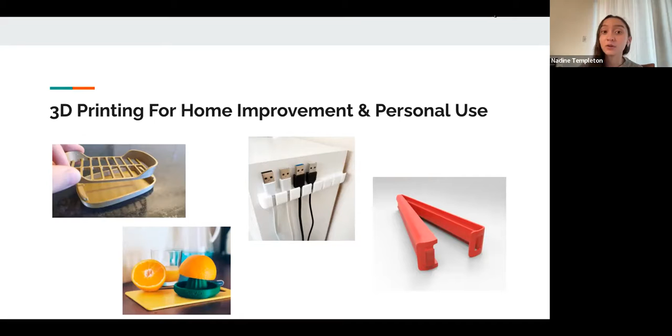On the internet, there are also a wealth of resources for 3D models that you can access on your own. One website is called Thingiverse, an open source 3D print or 3D design database that you can access for free. With this, you can search for any sort of practical 3D model you'd like to print, such as a phone stand or a cable organizer, and find the 3D print files to import into a 3D design software.

And if you're an IU student, or you're in a place that has a 3D printer, or you have your own 3D printer, you can simply import these files and print them off yourself—you don't need to do any designing at all. The hope is that in the future, 3D printers will be just as essential as a smartphone or wireless internet, so you can print these practical things on your own.

Okay, so now we're going to move into our tutorial for the evening, and we're doing a self-watering planter, which I'm really excited about. Do we have any questions before we move on?

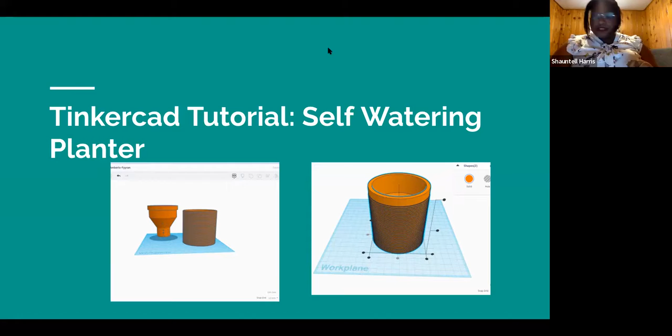So if you want to go to tinkercad.com and create yourself an account, if you don't have one already, to follow along.

Yes, okay, I will get out of here, hopefully. One moment, please. Uh-oh, where'd it go? Sorry. Okay. Now I'm going to screen share again.

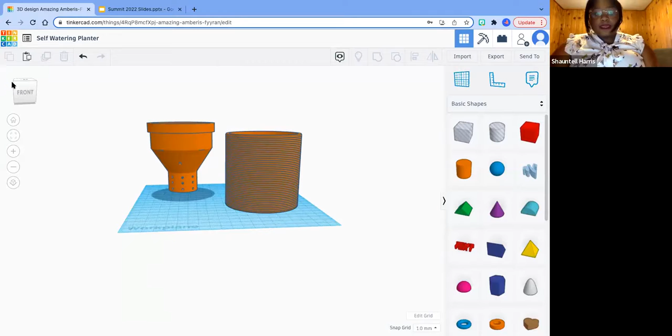Okay, so this is what we'll be making today. It looks a little difficult, but I promise it's not. Tinkercad is a kind of platform that you could use to create your own 3D printed items. It's very user friendly, and it's something I highly recommend for beginners.

So we're going to go home and create a new one. Sorry, it's taking a little bit to load.

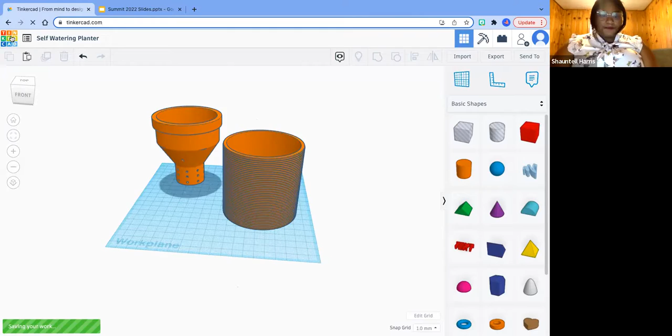We're going to create new design. Oh my goodness, I totally forgot.

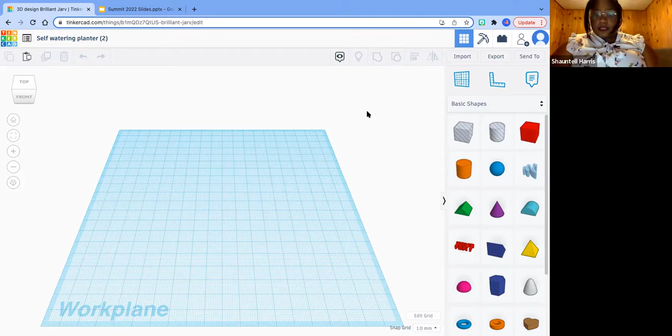Okay, I need to. And then we are going to start out by moving a cylinder to our work plane, and we're going to change the dimensions. We're going to make the length and the width and the height 80 millimeters. I find it easiest to click the boxes and manually put in the numbers.

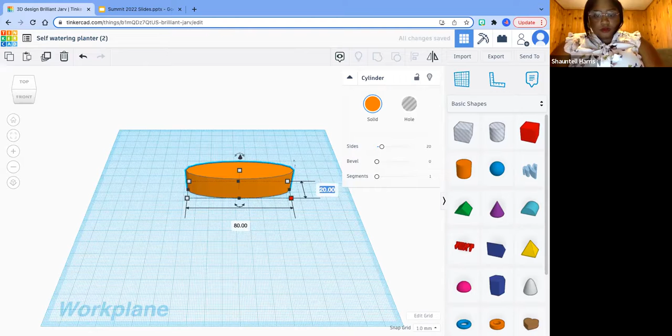There's a question in the chat: is there a code for this? You would just be starting from a blank Tinkercad work plane, if that answers your question. Or are you asking about the direction?

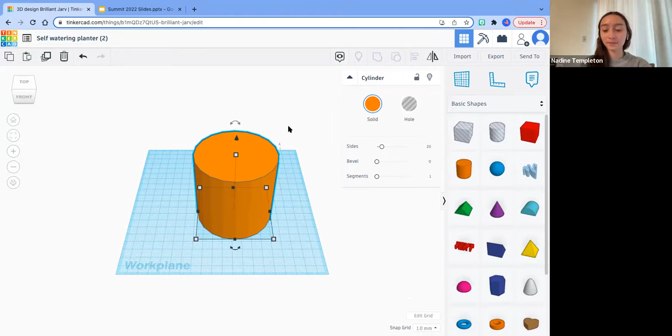So this is just our regular pot for it. And we want to add a little bit of dimension to it, make it a little fancy. So we're going to add some ridges to it.

We're going to do that by taking another cylinder and dragging it to our work plane. And we're going to increase the sides to maximum, and you'll do that right here. I didn't do that right here, so let's do that.

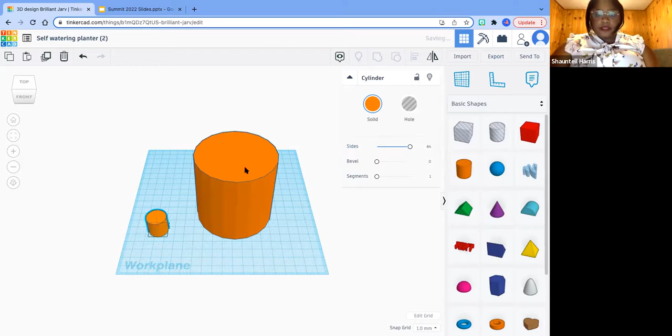And then for this new one, we're going to change the dimensions. We're going to give the cylinder a length and width of 81 millimeters. And we're going to give it a height of 1 millimeter.

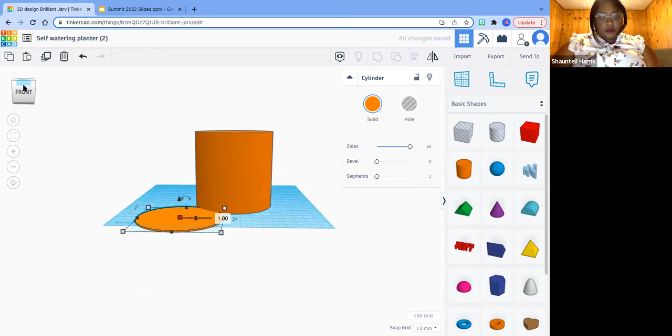So now we're going to move this second cylinder underneath this first one. And we want to align them, and we're going to do that by selecting all of it and using this button in the top right. And we want to click the center ones to center it.

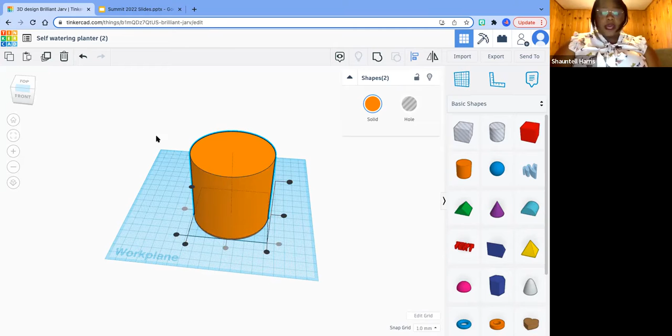Now we want to get out of align mode, and you just can click off of it. I'll zoom in a little bit so that we can see it more clearly. And we want to duplicate it.

So you do it by clicking the smaller cylinder. And there's a duplicate button up here in the top left. And you can also do Control D if that's easier for you.

So whenever something duplicates on Tinkercad, it duplicates right on top of the item. And so what you want to do is take this black triangle right here and move it up about 2 millimeters.

Like that. And then we want to make all of these go all the way up to the top. So you'll duplicate the second one we just made, and it should go up 2 millimeters. If it doesn't, you can move it yourself.

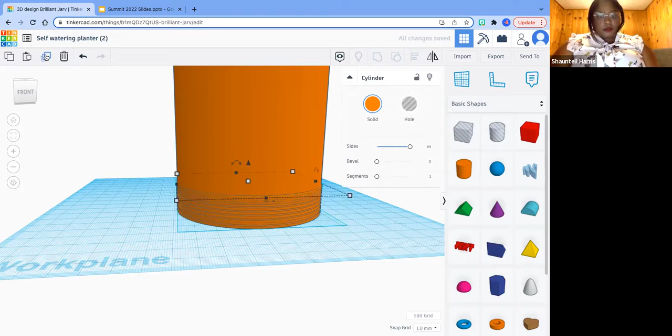And keep duplicating until it gets to the top. Whenever you see a red line on your item, it just means that it's loading. Let me zoom out just a bit. Not that much.

Sorry, it's taking so long. It was a little bit quicker earlier today.

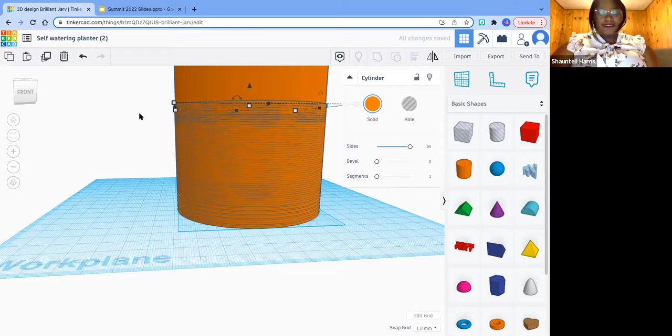Okay, now that we have ridges all the way to the top, we want to hollow out the inside of our pot.

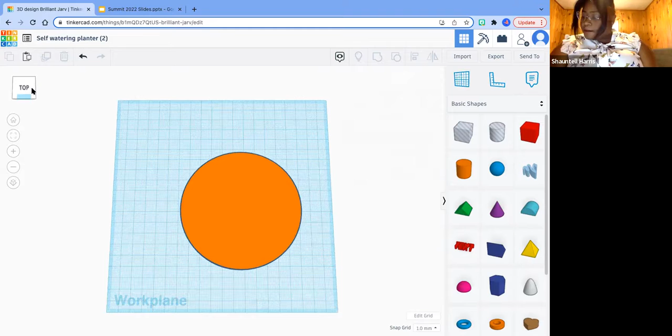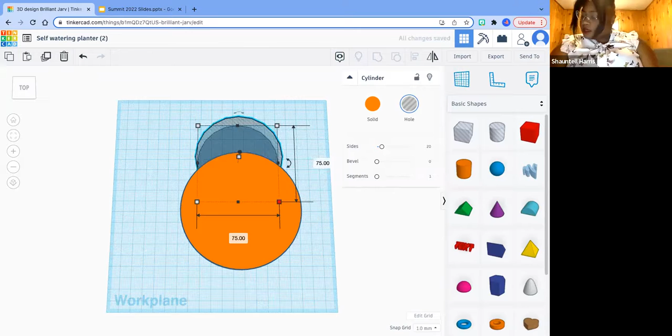And we're gonna do that by dragging a cylinder hole to the work plane. And we're gonna give it a length and width of 75 millimeters. And a height of 80 millimeters.

Okay, that's from top view, sorry. So when we group these two objects together, a hole will be created, and we want to make sure we have some thickness at the bottom so that it can hold our water, since this is a self-watering planter.

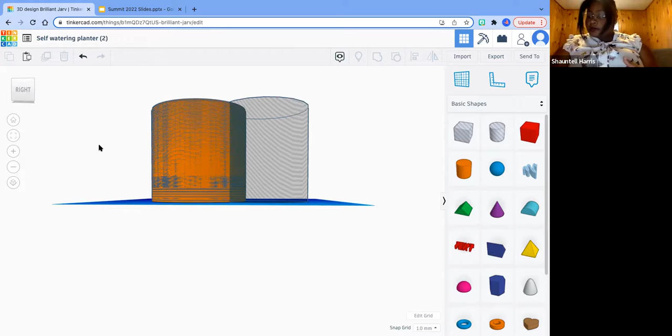So to do that, we're going to rotate our view to the bottom, and we're going to click the center square of this one, and we're going to change the height to 75.

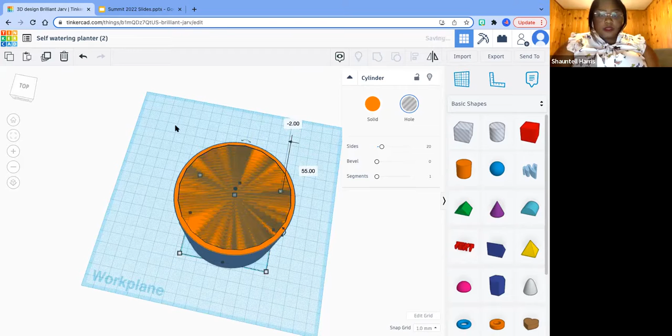Now we can align them. So we're going to go back up to top view and put this on the inside of this one, collect everything, and align it with this button up here.

Okay, and then once they're all aligned, we want to group them together, and then that'll make our hole. The group button is up next where align is too. Or you can use Control G.

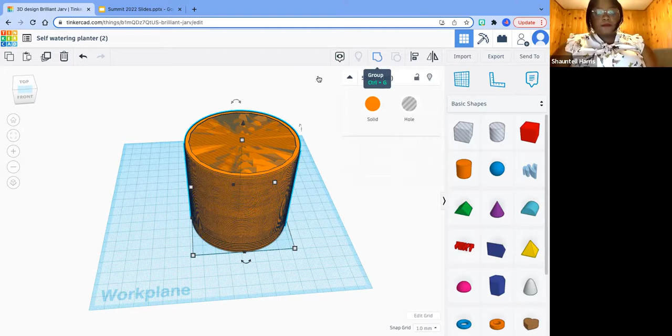Sorry, it's taking a little bit. Okay, there we go. So there is that. That's how it should look.

And that's the first part of our planter. Do we have any questions?

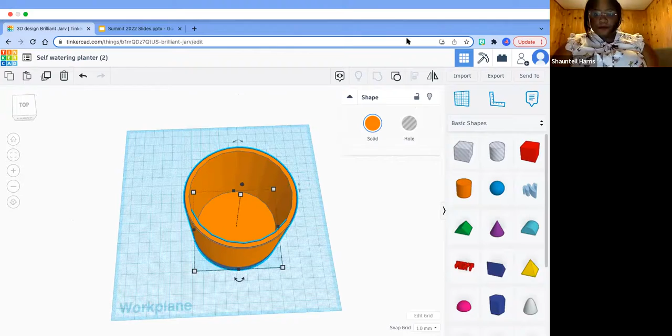So we can move this off to the side since we're done with that for a moment. And so now we're going to start with the inside of it, which is the more complicated piece of it, but not to worry. We're going to start by moving another cylinder to our work plane.

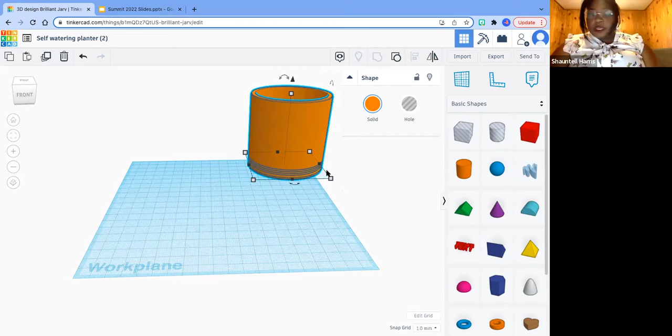And we're going to set the length and the width to 35 millimeters and the height to 24.

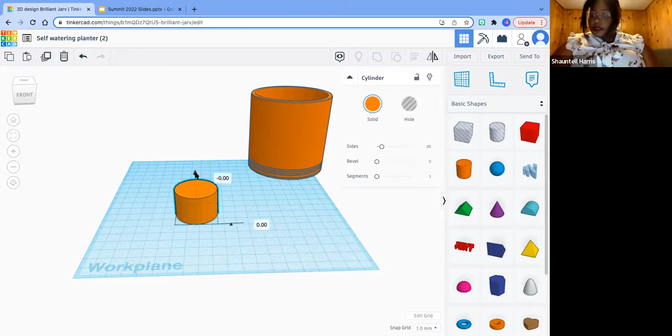Next, we want to move the cylinder upwards by 6 millimeters, and we're going to do that using this black arrow right here. Since this is how high it'll actually sit inside of the planter.

Now we want to drag a new work plane onto this cylinder, and you can do that by using the work plane tool up here.

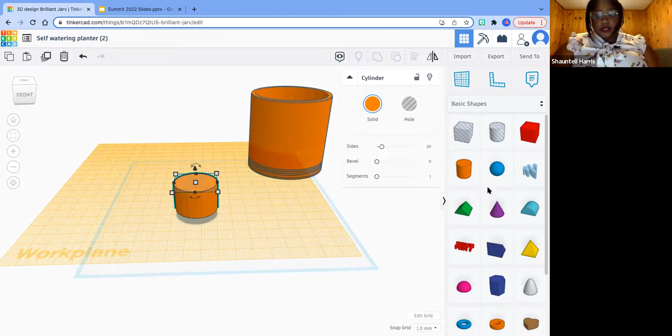And next we're gonna drag our cone shape to the new work plane. We want to make sure the sides are at maximum.

And we're gonna set our top radius to 37 millimeters, and you can do that by just clicking the boxes over here, which I find is easiest to get the exact measurements I want. The base radius is going to be 17.5 millimeters, and the height is going to be 30 millimeters.

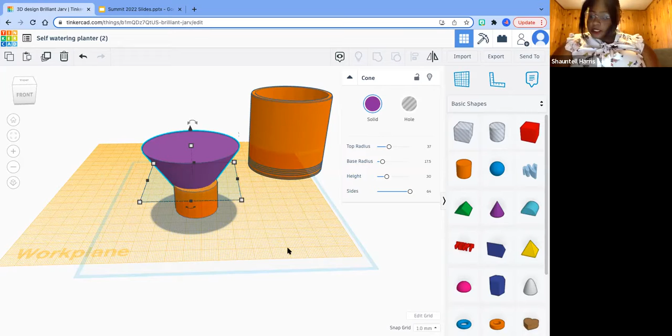Ta-da! Now we want to align these shapes. And so to align them, you're going to hold down Shift and click both of them.

And then click the Align button up here. Okay. Once those are aligned, we don't want to group them together just yet.

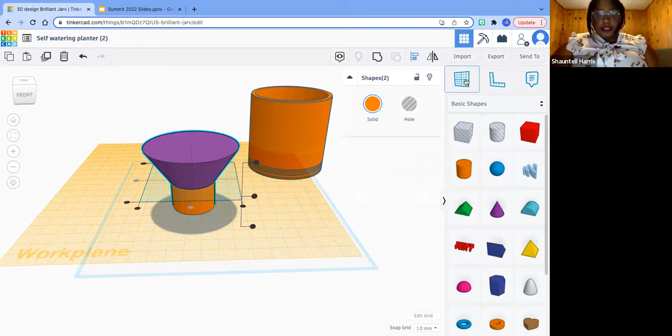We want to add another work plane on top of the cone. Let me zoom out just a little bit. And then we're going to add another cylinder on top of that.

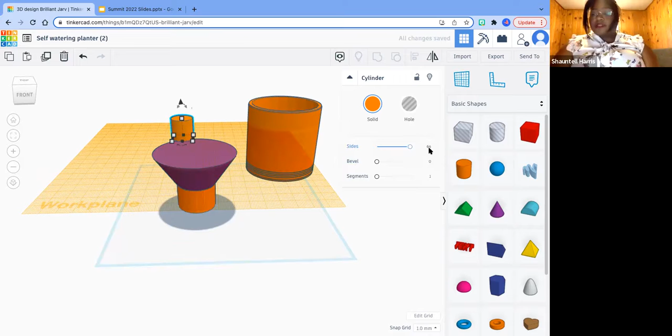We want to make the sides maximum. And then we want to have the length and the width to be 80 millimeters. Okay, and the height to be 10.

I'm sorry, I'm just trying to make sure I'm doing the right thing. I'm looking at the tutorial along with you.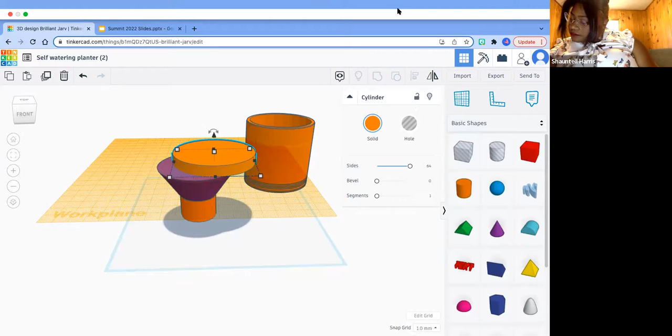Okay, now we want to add one more work plane and add another cylinder on top of that one. And this one is going to be 80 by 80 by 10.

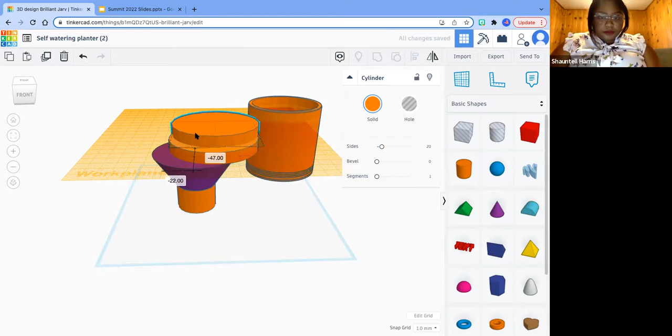Now we want to... I think I might have given the wrong ones. Okay, my apologies. So for this bottom one, I gave you the wrong dimensions, and we're gonna change those to 74 by 74 by 20.

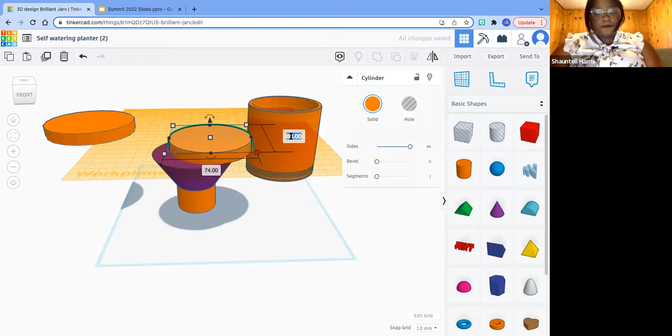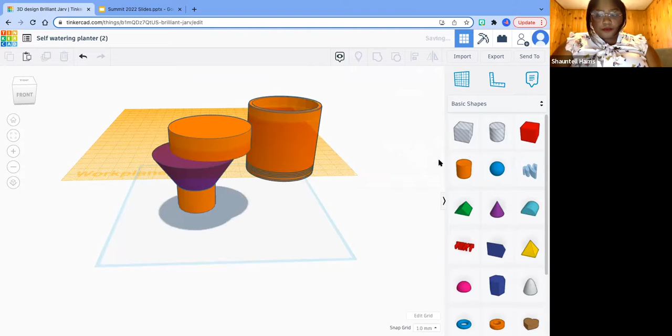So it should be a little bit thicker than this one. I'm gonna delete this one and do it over. This one is 80 by 80 by 10.

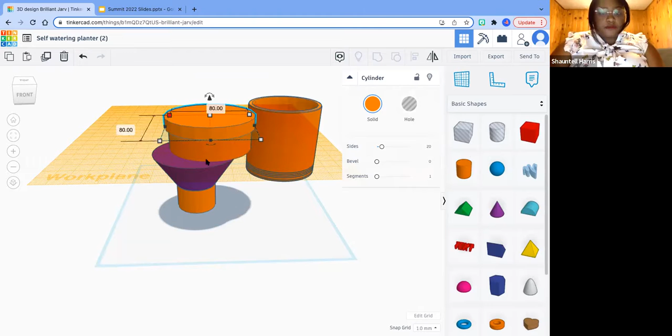There we go. And then we want to align these. So you do that by holding Shift and clicking both of those and aligning them right here. There we are.

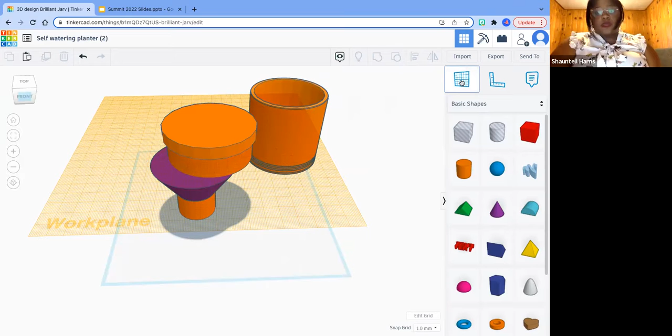Okay, and now we want to move our work plane back to the bottom. So you do that by clicking the work plane and then clicking the ground. Ta-da! Okay, so now we have 3 pieces: this one, the cone, and then this bottom piece.

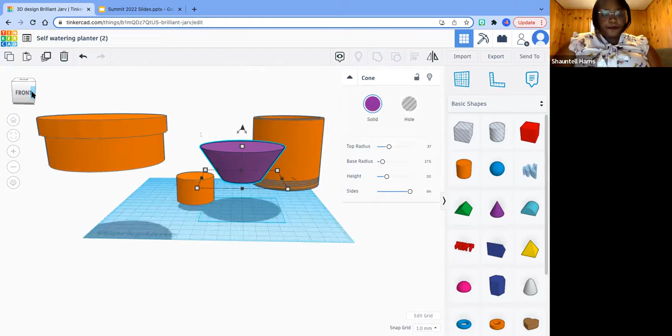And so now we want to hollow these out so that water can go into it. And we're going to start by working with the top 2 cylinders right here. So the first thing that we're going to do, once you move all the other pieces out of the way, you want to click on them and click on the bottom cylinder and duplicate it.

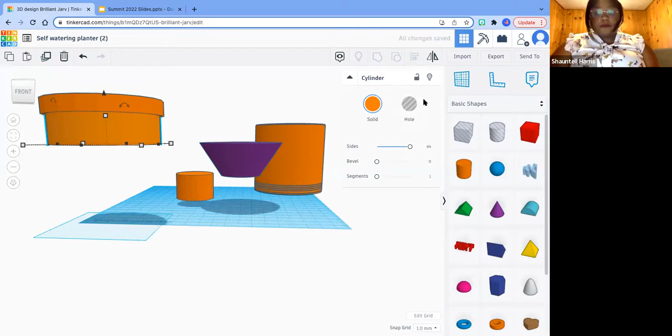And it duplicates on top of it, but you want to make it a hole. And then we want to change the dimensions of it to 71 by 71. So it's just a little smaller.

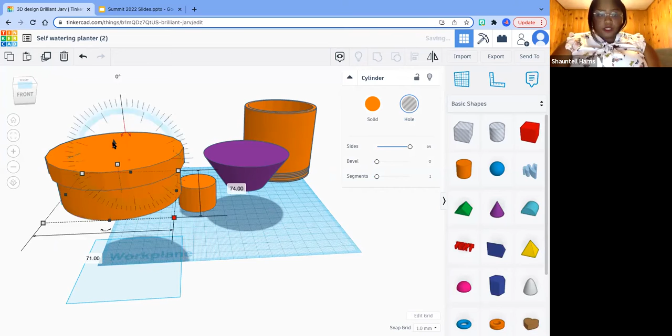And then we want to take this black triangle and lift it all the way up until it protrudes the top. And then we're going to highlight all 3 of them and align them first, and then we're going to group them.

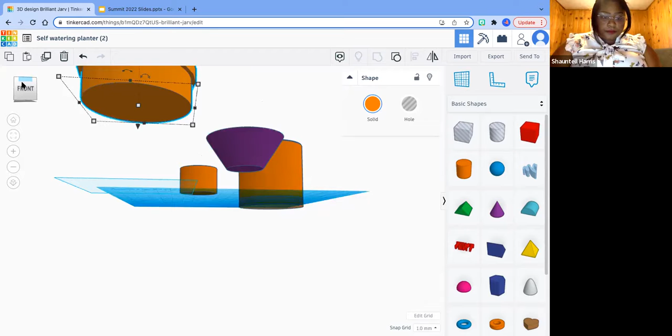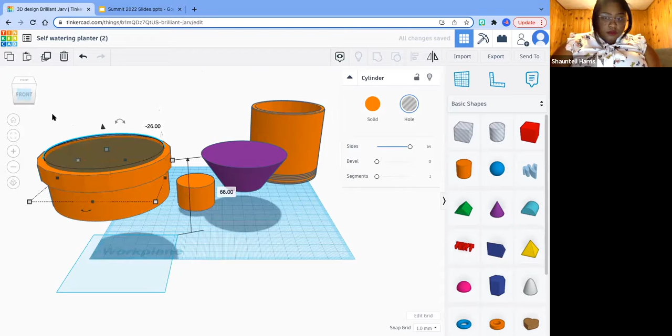Let's try that again. There we go. It should be a hole all the way through, so let me fix that. Ungroup them. Uh-oh, I'm having a little trouble today.

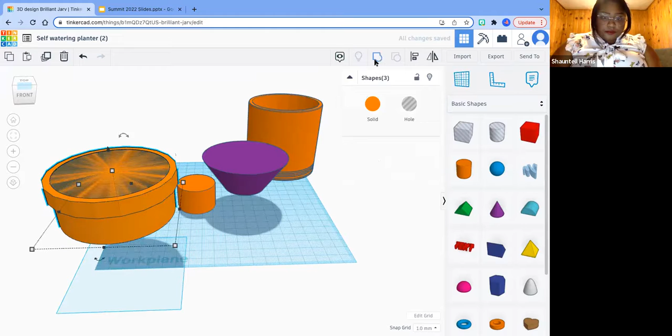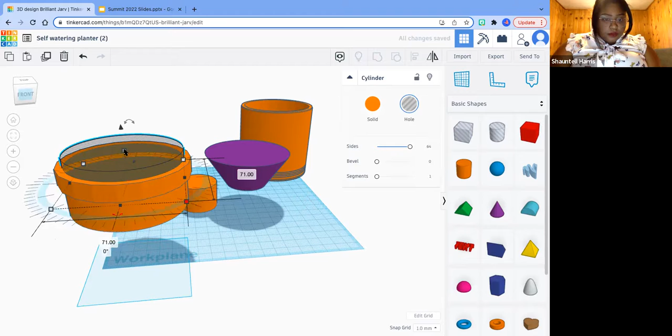What is it that I'm doing wrong? My apologies, everyone. Let's manually make it longer. There we go.

And now we'll group them all together. There we go. There should be a hole in there.

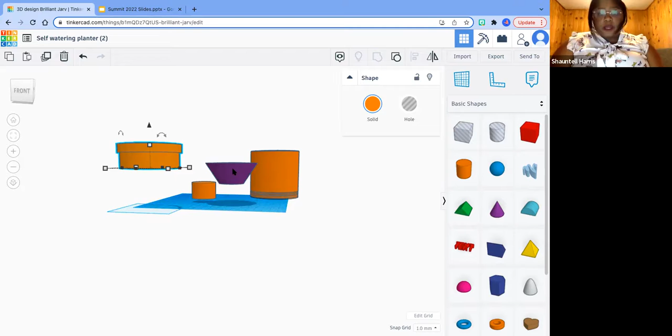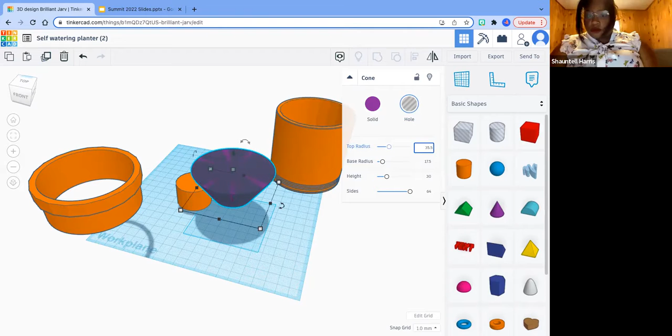And then since we hollowed that one out, now we're going to hollow out this cone. Let me zoom in a little bit. So we're going to do the same thing: duplicate it and make it a hole. And we're going to change the top radius to 35.5 and the base radius to 17.5.

Now we want to align them. Just these. They're already aligned, and now we want to group them together. And now that one has a hole as well.

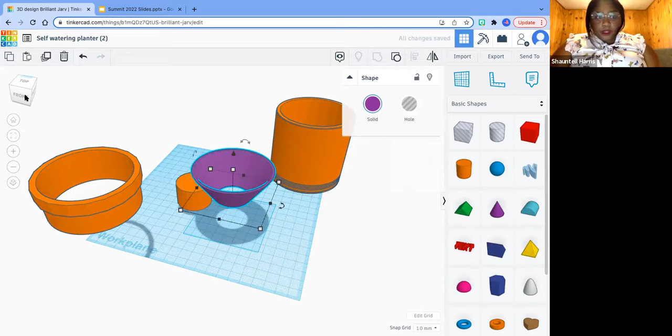Now we want to do it to this bottom piece. Move it forward a little bit. So we want to duplicate this one as well, turn it into a hole, and then we want to change the length and width to 24.

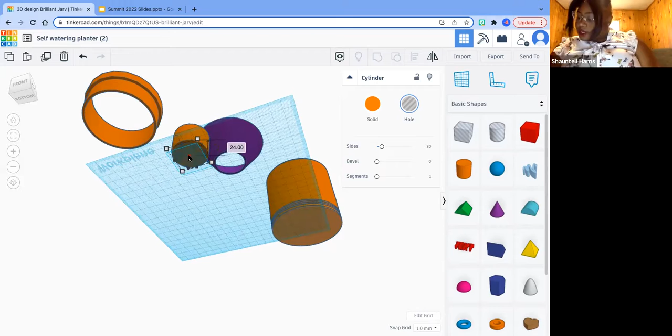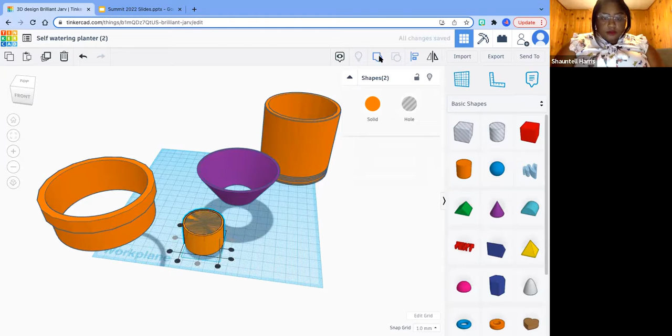And now we want to orbit our work plane to view it from the bottom. We're going to take this middle white square here and change the height to 21. Now we're going to go back to the front or the top view, whichever works best for you, and align them and group them together. So that shouldn't have a hole all the way through, like the other two items.

Okay, now we're gonna assemble our inner pot. So we're gonna move all three sections near each other. Let me change my view.

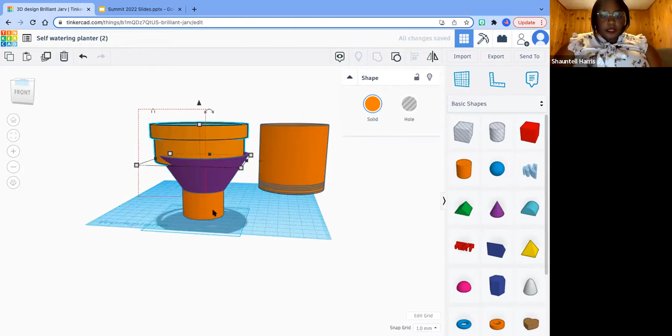We're gonna highlight all three and align them. I'm gonna click these center ones. So now they're all aligned and we wanna group them together. There we go. As you can see, when we group things together, they all turn the same color, which is what we want.

With 3D printing, you usually can only print one color at a time, unless you have a very, very fancy printer, then you can do 2 colors. But if you print both of these pieces separately, you could do different colors if you'd like.

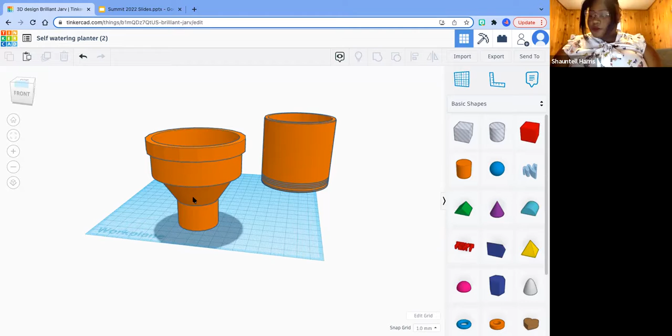Okay, so now we wanna make the holes for the water absorption. We're gonna start doing that. We're gonna move this over a little bit. And we're gonna bring a cylinder hole to the work plane.

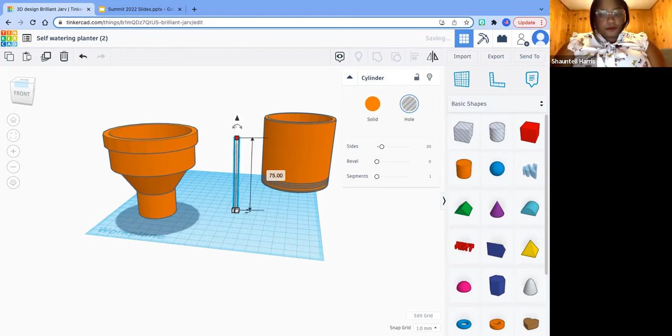And we wanna make the length and the width 3 millimeters, and the height 75. So it should be really long and skinny. Okay.

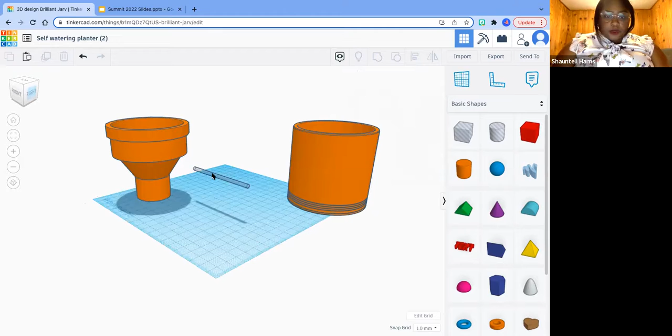Now we want to take this and use this arrow right here to rotate it 90 degrees so that it's horizontal. Now this part can be a little tricky and it'll take a little bit of time. No worries though. You want to move it over to here.

Actually, yes, I skipped a step, but it's okay. You can use this arrow to move it up and down, and you can use your arrow keys on your keyboard to move it left and right.

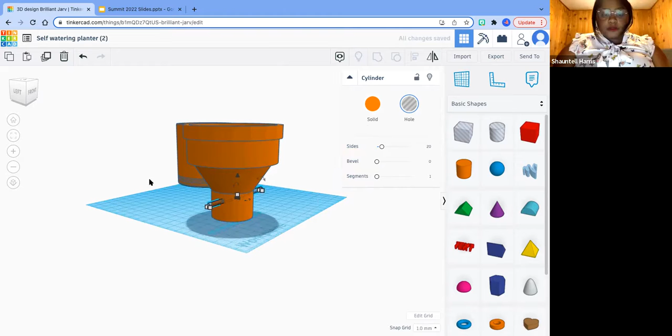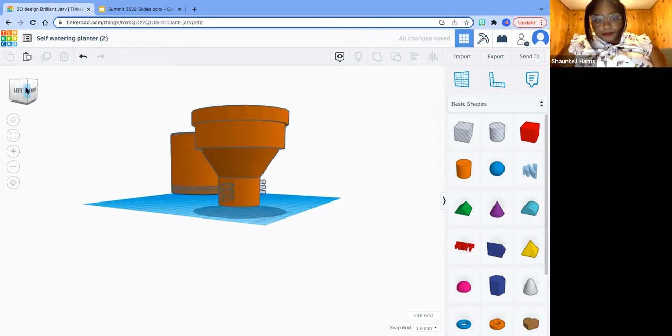You want to make sure it's poking out of both ends like that. Then duplicate it and use this black arrow to bring it down. Duplicate that again, and you should have 3, like that. Now highlight all 3 of those and duplicate it, and take this bottom arrow and turn it 45 degrees.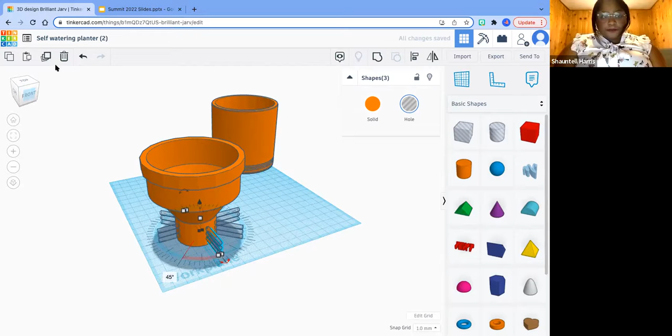Then take those 3 and duplicate it again until you have 4 sets, like that. Mine is a little uneven, but that's okay.

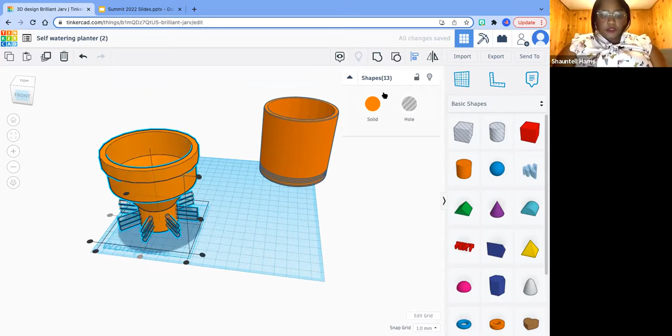We want to highlight all of that, and you can align it if you like, then group them together, and that'll make your holes at the bottom. We want to make some holes through here as well, so we're going to take another cylinder hole, using the same dimensions, 3 by 3 by 75.

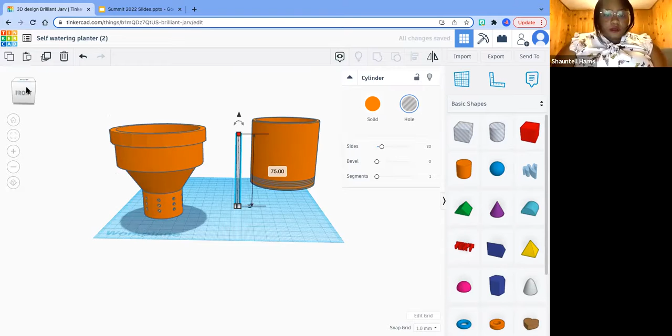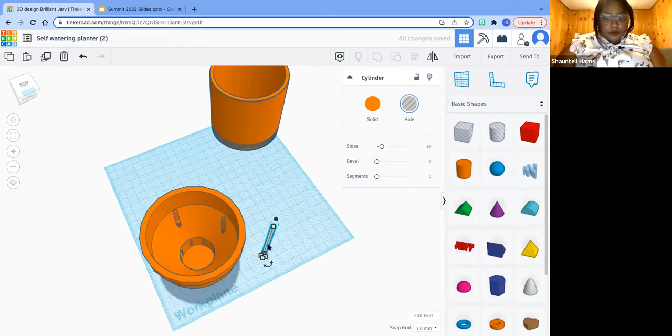You want to put them through here, not all the way at the edge, and check to make sure it's coming out so that when you group them together, there's a hole. Duplicate that one and bring it over here, and do the same thing for the other two sides, just to make sure they're on all 4 sides.

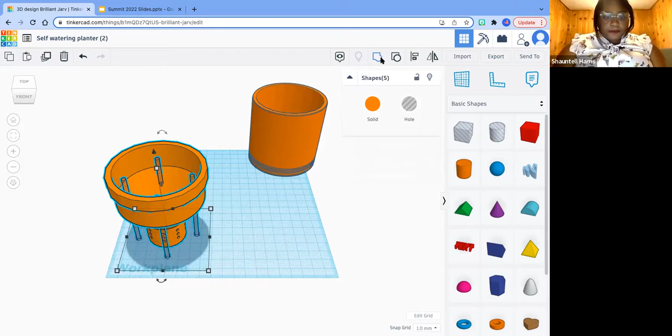Click all of it and group it together, so you should have this. That's pretty much it, we're all done with our planter. You can put them inside of one another because that's how it'll actually be when you put them together. To see what it would look like, you can align them.

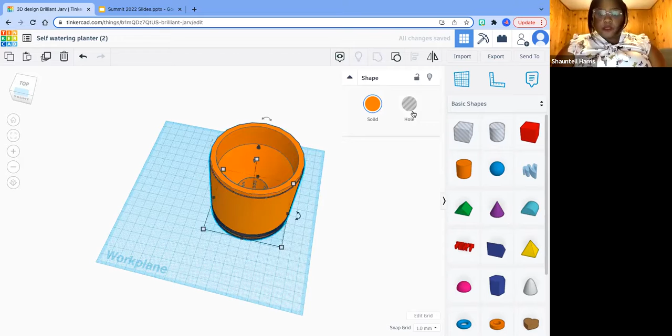I grouped them together by accident. You can align them. And if you click off and then click the outer one and make it a hole, you could see the inside. And that is your planter. Do we have any questions, or is there a piece of it you guys would want to see again because I moved too fast?

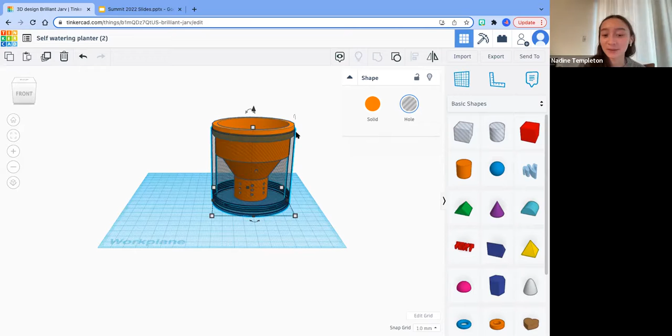Just by a show of hands, how many of you have house plants at home or anything like that, that you think you might want to use this for? Feel free to just raise your hand in Zoom.

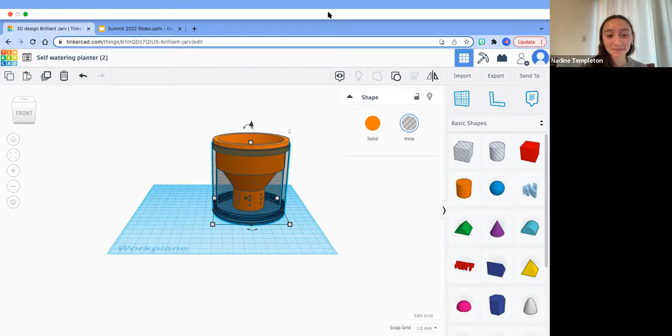Is there anything that we can answer for you or show you again? I know I went kind of fast and I messed up quite a bit, so.